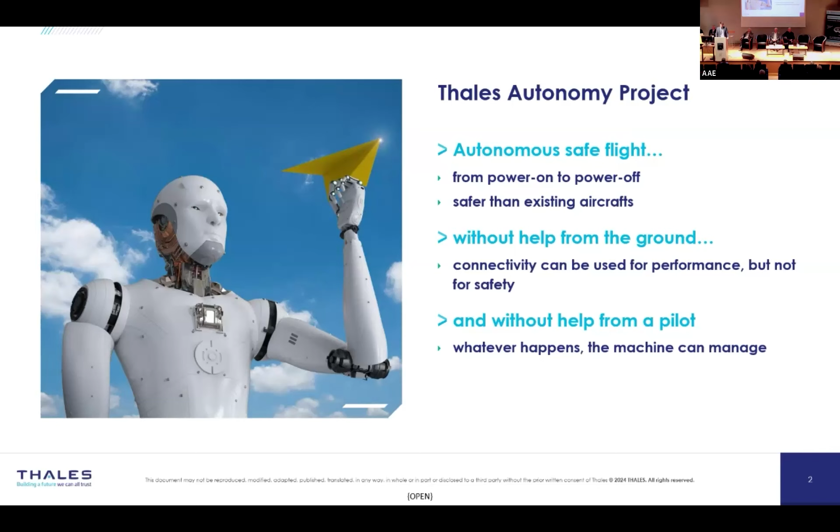So as we know, it won't be performed in one day. We chose a stepped approach. We started to mature the autonomy solution on drones, and more specifically the long-range drone developed by Thales, the UAS 100. And we have also started the second step together with the new markets of urban air mobility and regional air mobility that are very interested in autonomy because their platforms will only have a few passengers, maybe a couple, maybe less than 10. And in that case, the cost of the pilot is very important, and removing the pilot is quite necessary to have a business running.

This is on the success path of these markets, but it's interesting to push in that direction. The third step, I won't comment on because, as you know, it won't be tomorrow, nor the day after tomorrow. I put 2040 plus, which means maybe 2050, maybe never, depending on the future. But it's still the horizon that we have at the end.

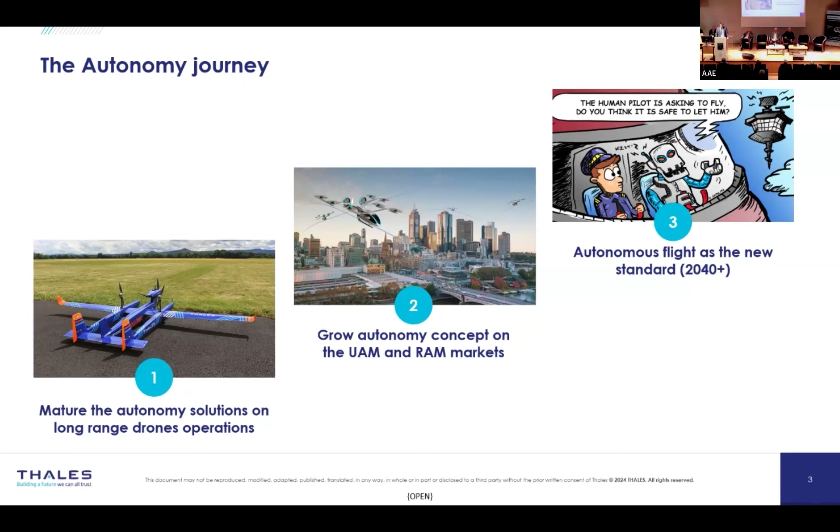From a technical point of view, the challenges of autonomy can be summarized as follows. First, there is autonomous trajectory management, because today one of the main tasks of the pilot is to adapt the trajectory depending on the events that happen during flight, depending on the failures, depending on the weather, and anything that can happen in flight or on the ground. I will give more details on that topic later on.

The second challenge is autonomous takeoff and landing. You are all aware of ILS Cat 3, which is almost autonomous, except that we still have a pilot in the loop monitoring the system. So there is still one step missing. Moreover, for landing and for urban air mobility, for example, installing an ILS Cat 3 on every airport or every vertiport is not an option. It's too costly, and we have to find new, more cost-effective ways to perform autonomous landing. So this is an important task of our project. There is also, of course, the challenge of autonomous taxiing and takeoff. For taxi, I saw a few examples in previous presentations.

The third challenge is air traffic management, with ATM or UAS traffic management, so-called UTM, and the key technology that we are working on, which is detect and avoid, which aims at replacing today's see and avoid performed by the pilot when he sees another aircraft or ground obstacles. And we need to find solutions to that problem too.

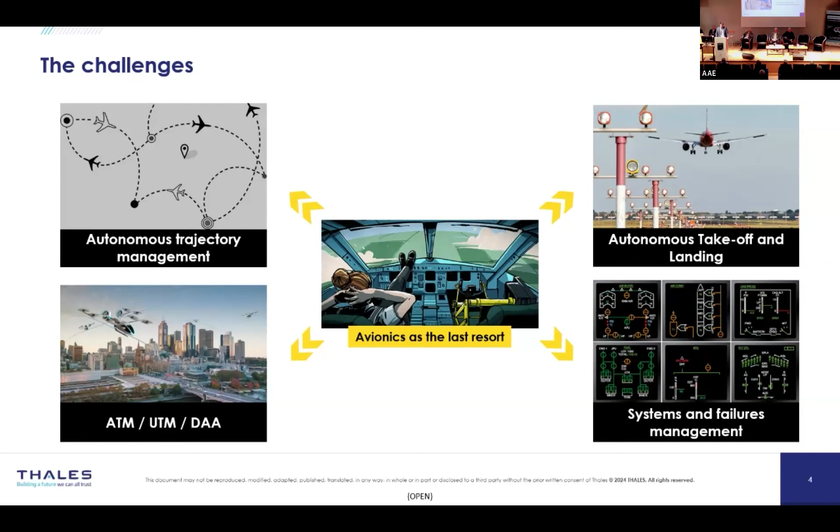So now let's get a bit more concrete. So I will illustrate our work on a use case of the first challenge of the first market, so autonomous navigation and drones. And here, one challenging task for the operator is what we call the car tracking mission, typically when you want to follow a car, usually for surveillance operations.

And the issue with this mission is that you don't know the trajectory of the car in advance. So you cannot plan your mission beforehand, then launch the aircraft and wait until the mission is over. You have to adapt your mission live. So it's a great challenge for autonomy.

What we decided is to use a neural network, trained in reinforcement learning, to generate the trajectory. So here you see in black the path of the car, and in green and red the path of the aircraft. And the main issue here, because our drone is a fixed-wing drone, is that we have to be slow enough to follow the car if the car is slower than the aircraft. So this is why we are doing these loops. It's just because we want to follow the car and be at the same speed as the car.

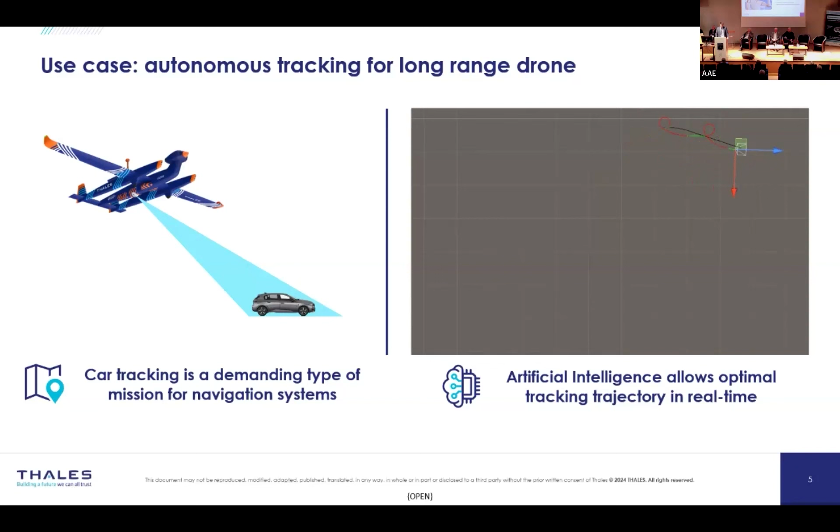Now, let's get to the problem. The drone that we are working on, so it's not an issue, it's a fact, weighs 100 kilograms. So for this type of drone, you cannot afford to crash it, or at least you have to ensure it does not happen too often. And in the regulation, this is called certifying up to design assurance level B, Bravo, for catastrophic failure. And in terms of integrity, it's a 10 to the -7 level.

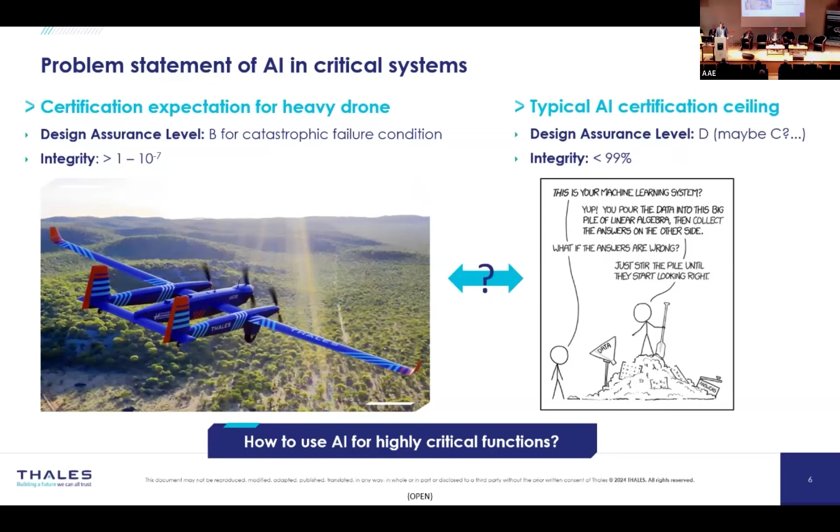On the other hand, the typical AI performance, and I'm free to discuss that with any expert in the room, is roughly around 99% for the best performing models. Probably people will argue that they do better, but if you take the raw performance of the model alone, it's very hard to go above this ceiling. So it makes sense to certify these models up to DAL-D. C may be discussed, it's something that will be opened by regulation, I believe. So maybe Guillaume will provide more detail on that. But you can see that there is still a gap between the safety objective at aircraft level and the safety performance of AI.

To solve this issue, we decided to adopt a specific architecture. So here I provide first the hardware perspective. We combine, and this is where we have the best of both worlds, on the left an edge computing platform, which is very high performance hardware, meaning GPUs able to run neural networks, and that is really designed for AI, but everything has a cost: it is not certifiable up to DAL-B, Bravo, but only up to DAL-D, Delta. So it's basically a high performance, low assurance or low safety level computer.

On the other hand, we are developing at Thales a safety critical computer that is quite the opposite, I would say: high assurance, so certifiable up to DAL-B, Bravo, but with moderate performance because it's not designed for performance. Both of these computers are basically the size of my hand, so it's very low SWaP, and they can be embedded on board the drone.

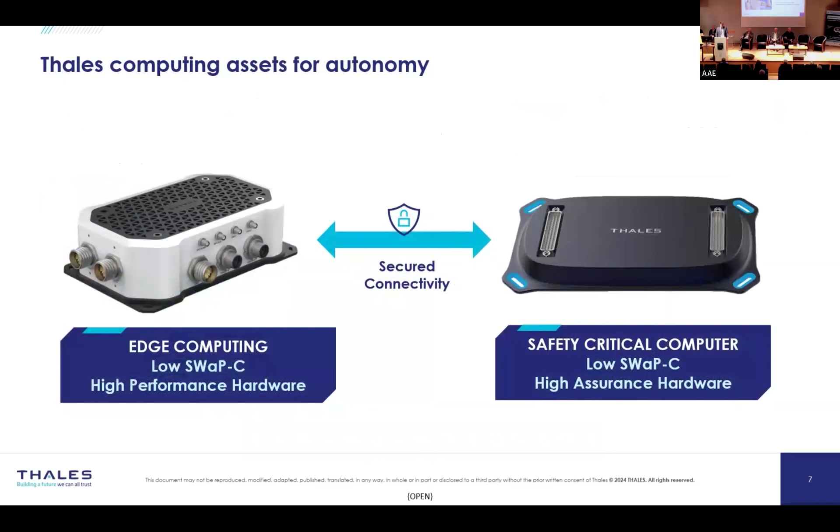Now, how to use these assets. So here I provide a very rough description of the architecture of the drone. You have still on the ground the ground control station. So I said it's autonomous, but anyway, an autonomous aircraft needs mission intent.

It needs an objective. So here, this ground control station is not for piloting the aircraft, but rather for giving to the drone its objective. So it's for an operator, not a pilot, to designate the mission objective, and then it is sent on board the aircraft. Then on board the aircraft, you have the two platforms that I described earlier.

The first one, the high performance one, will receive the mission objective and generate the trajectories using AI as I described. And then as a second step, these trajectories are sent to the high assurance computer on the right-hand side, where the trajectories are checked, and then where the drone is guided onto the trajectories.

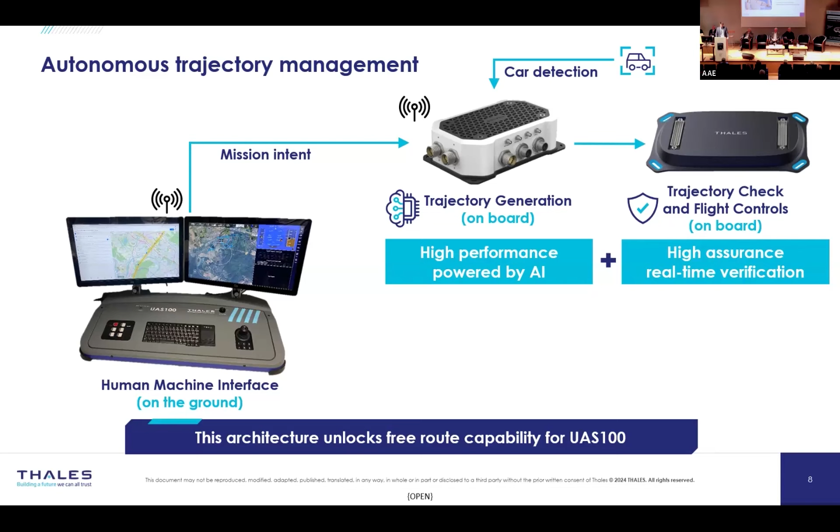With this architecture, we're able to have a high performance trajectory generation, but still a high level of assurance, a high level of safety, thanks to the check of the trajectories by the high assurance computer. And this is really the architecture that unlocked what we call the free route capability for the UAS 100 of Thales, because we're able to update very quickly, so every second, the trajectories, while keeping a high level of safety.

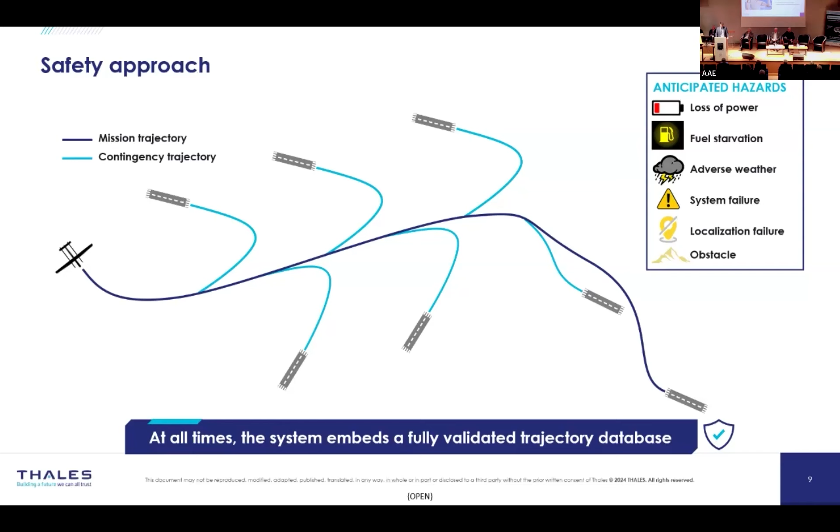And if I have been clear enough, you've understood that if the ground control station fails, if the communication fails, or if the high performance computer fails, we will still be able to terminate the flight thanks to the last trajectory database that is saved and executed on board the safe computer, I would say.

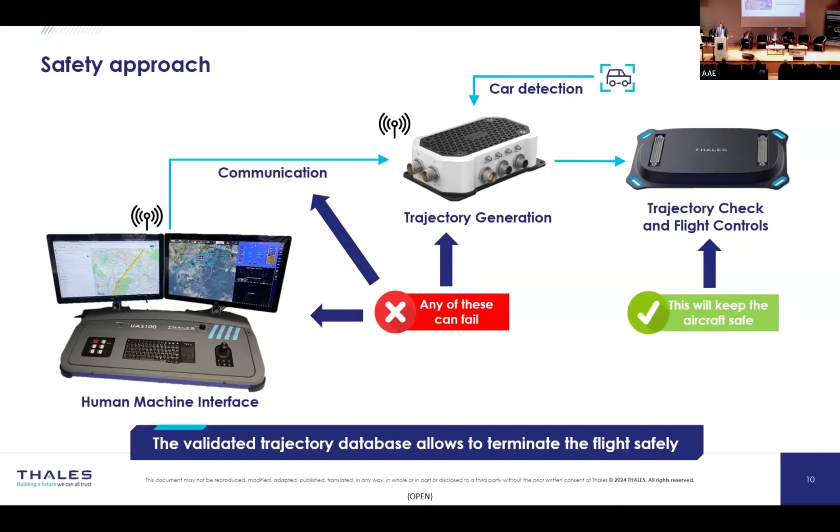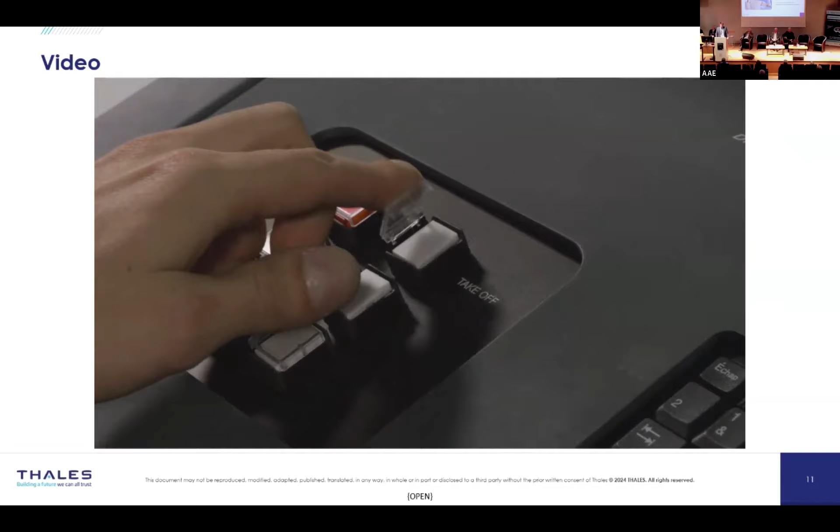These concepts have been flight tested in Canada. And here you will see a few pictures illustrating this flight test. So conceptually, in fact, the takeoff is initiated from the remote control center. When pushing the button, it will initiate the takeoff of the drone, and it will trigger, and we will see later, the continuous update of trajectories to perform the mission.

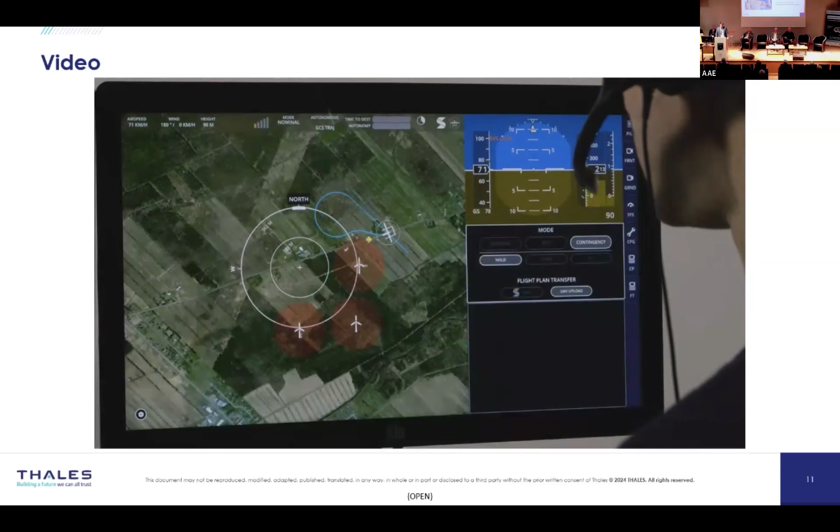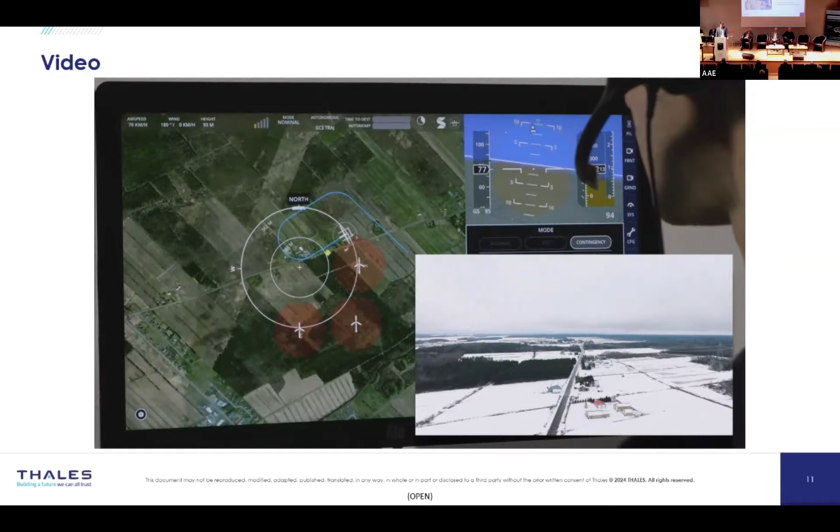As you will see in yellow, there is a point that is a car that is tracked, so acquired by the camera. And in real time, we're able to update the trajectories while avoiding the obstacles, so here windmills. And you see the frequency of update of 1 second. Here it's a simple mission, so you don't have contingencies because the trajectory is short enough to go back to home. But conceptually, we could simply add the contingencies. So you see here the sensor that is used to track the car.

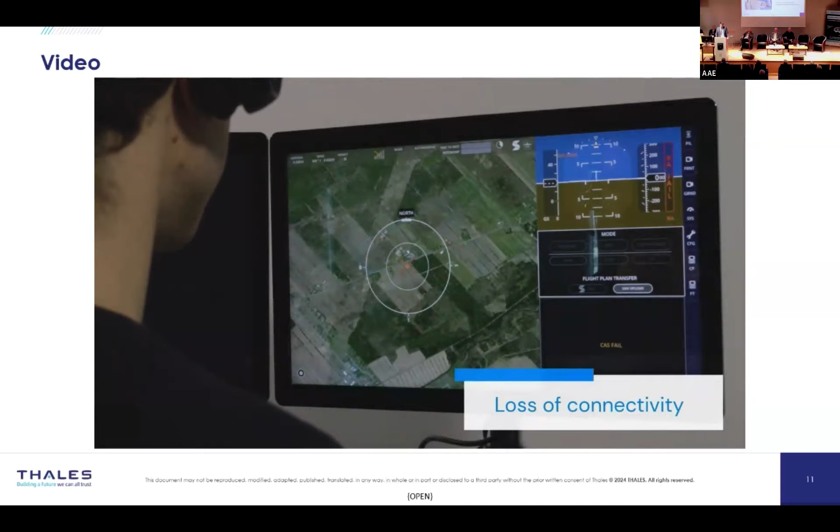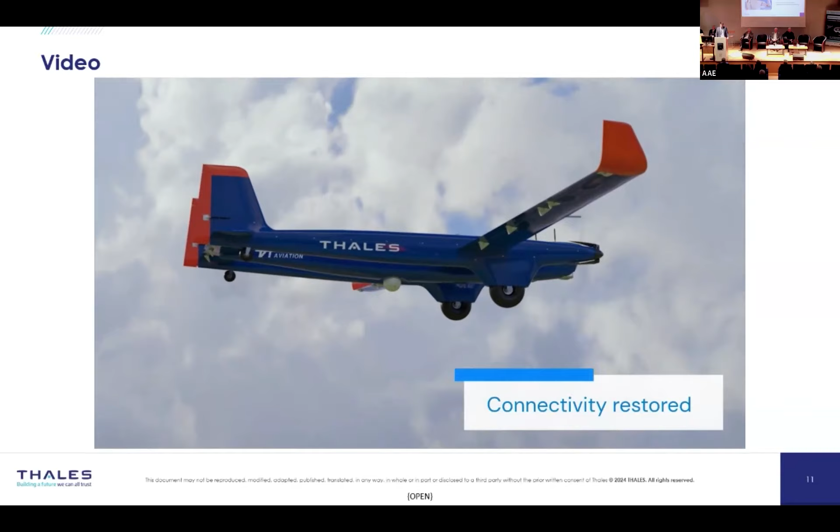And an interesting aspect of this architecture is in case of connectivity loss, because the trajectory generation is on board, you can continue the tracking mission. So you have no feedback on the ground, but you are still able to perform the mission in the air. And once the connectivity is restored, you can resume the operator in the loop, and you still have the mission that is performed. So you don't need to interrupt the mission.

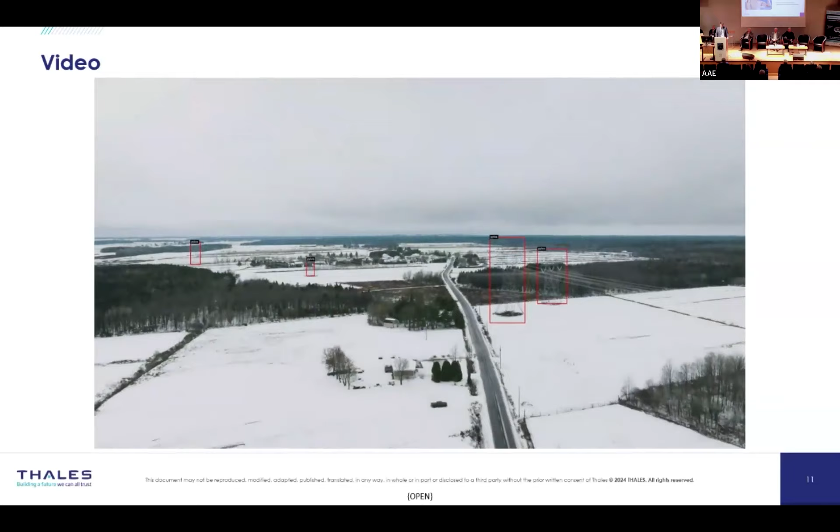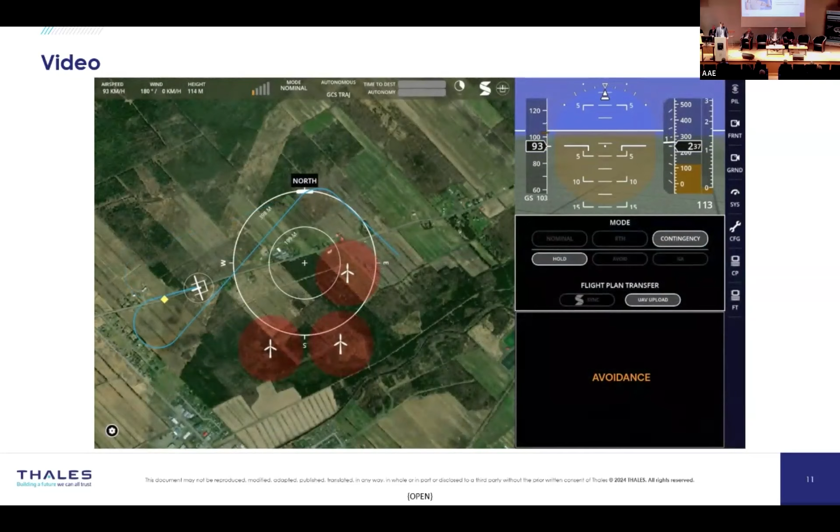We also have, I've not presented it, some computer vision algorithms for pylon detection. So for the detect and avoid function. So here again, once the pylons are detected, we are initiating a change of trajectory to avoid the power lines. And basically that's it. Yes, in the end, you come home, which is a normal operation for drones.